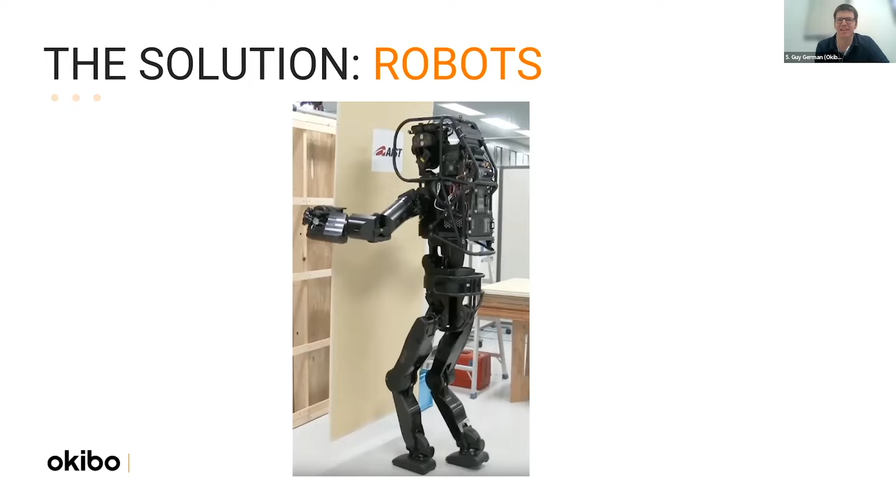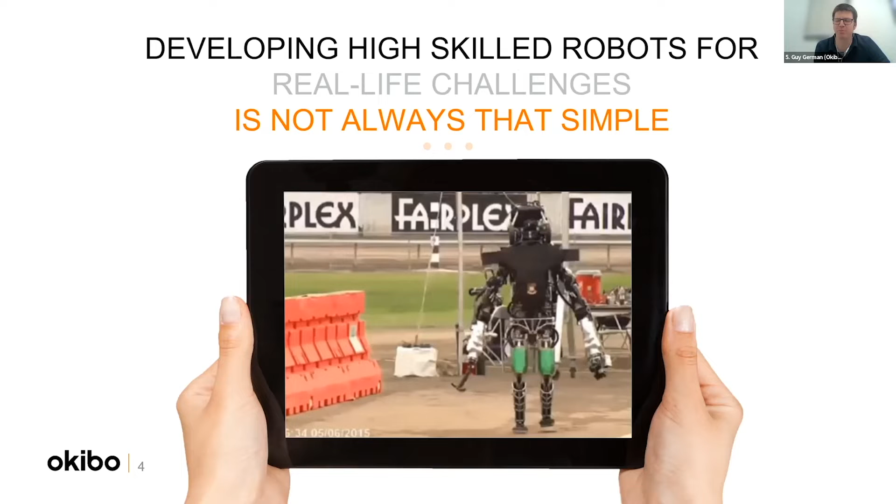So smart automation is obviously the right way to go for this huge industry, no doubt about it. And there's no better way to automate a process than using robots, which are smart automation. That's pretty much the trivial way to go. However, developing high-skilled robots for real-life challenges, not as a proof of concept or demonstrating capability, is not always simple.

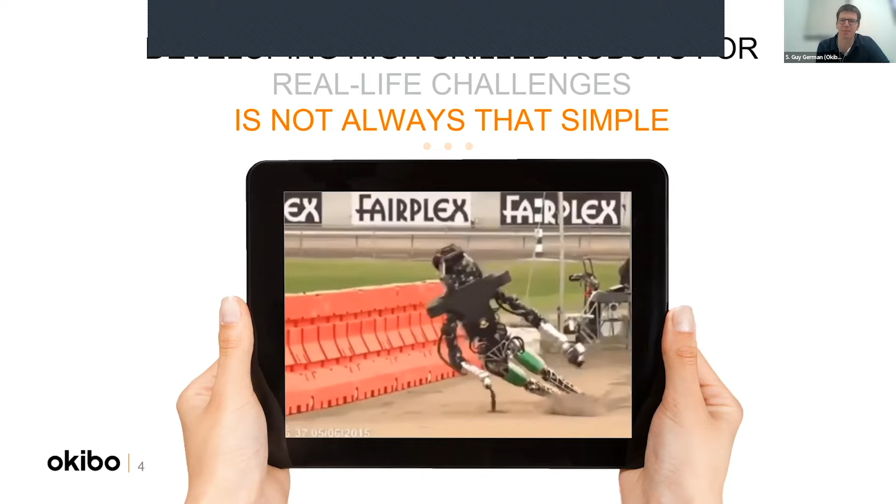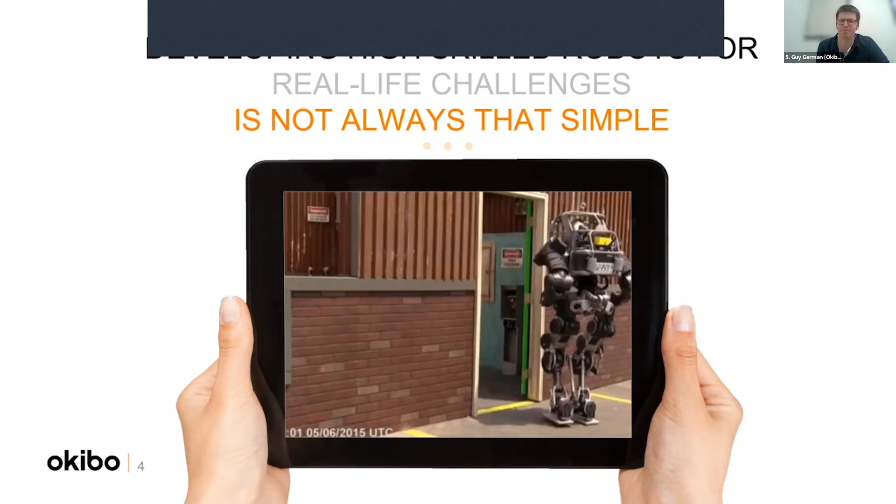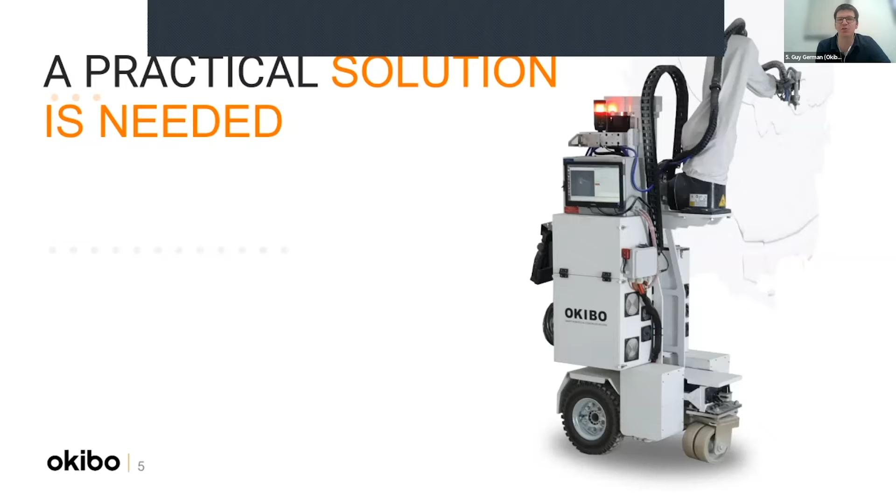It goes on and on. It's a funny video, but of course the problem is not funny. It's serious, and the industry needs practical solutions.

So what existed before construction robots were actually starting to be market available? There were basically three kinds of commercially available mature products. The first kind was AMRs or AGVs, robots working in production lines or in warehouses in very sterile environments. Usually these areas are marked with all sorts of fiducial markers and so forth, and the robots are carrying some sort of payload within this sterile environment, going from A to B—that's a solved problem.

The other kind of robots that were out there, that we have experience with for decades, are field robots for military use. Lately there are lots of solutions for agriculture technologies, fruit picking, and so on. Those robots are for outdoor use, doing some even smart operations with manipulators, but for a very definite sector—and I will later explain the difference between them and the realities in the construction industry.

The third kind are very accurate industrial robots, which usually require programming and do the same task over and over again, even if they have some sort of sensors, like in the production line to feel when the bottle is coming, or some sort of vision to support the work. It's pre-programmed and still a very, very structured and sterile environment. So these are the three kinds of commercially available solutions.

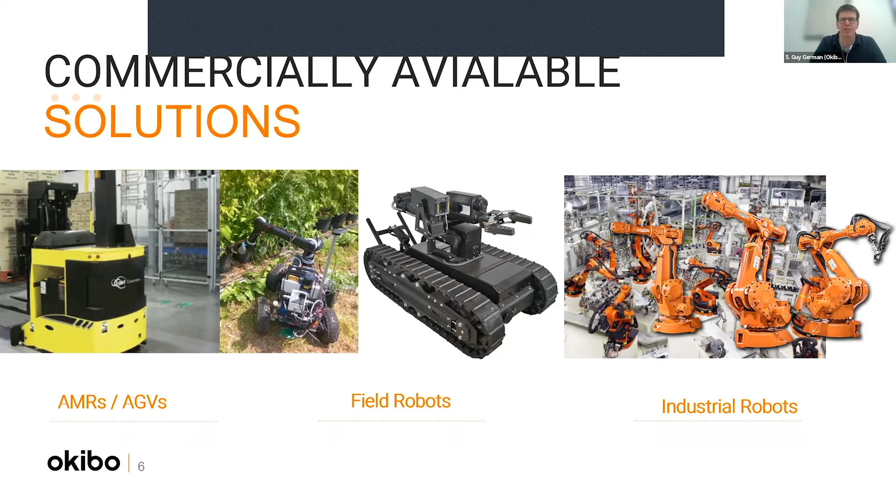But construction robots have different kinds of requirements, which often contradict each other and make the design of the robot more difficult. The robot, of course, in construction needs to be mobile—it cannot be static like the industrial robots. It also needs to reach the area where it's working. If we're talking about an indoor environment, you need to reach from floor to ceiling, but you also need to go through a doorway, so you need to be mobile.

So you need some sort of way to have telescopic capabilities to allow the reach.

It's not a production line, it's not a warehouse, so maneuverability is also a big problem. Working in a construction site, which is dirty - you have some countries more than others, but in some places you can have glass and nails and debris on the ground, which you need to pass even to reach your working area. And you have to be stable in order to do accurate work of fabrication.

So stabilization is contradicting maneuverability, because maneuverability, for example, requires the design of having rubber wheels like the field robots, which are out in the field. But when you have that, the whole system is not stable.

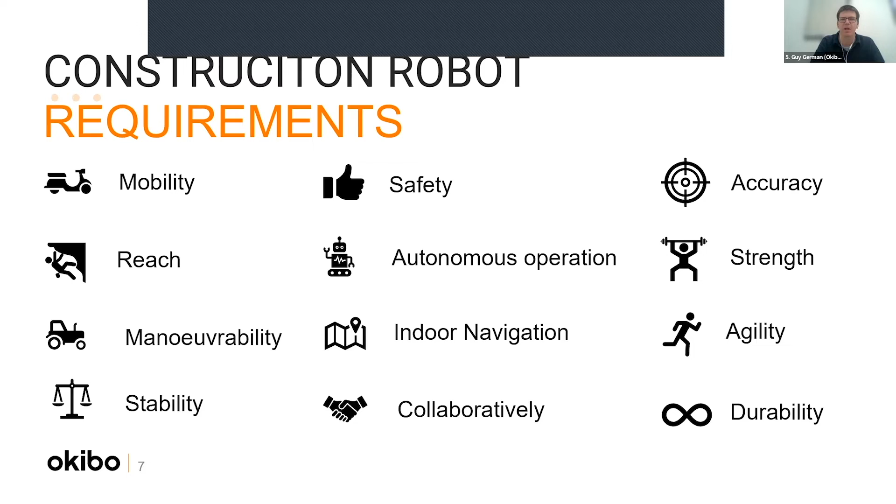So all this makes designing practical solution robots for construction sites pretty challenging. But most importantly, there are two things that without them, it's just going to be a project for YouTube - it's not going to be actually a product ever. And the first thing is reliability, because a construction site cannot offer exactly the same thing as industrial settings - robots cannot afford not working, cannot afford downtime a lot, because projects need to keep their schedules.

So that's the first thing. But even more important than all the other things, in order to have a practical solution, it has to be easy to operate. And that's just like three words - easy to operate - but behind that is basically all the technology that is required from a construction robot, because the tasks in every building are different.

In the same building, the same project, every room is different, and the same room is different from one day to another. And you cannot have an engineer programming a robot to do the work, because you don't have enough engineers, and of course you don't want to replace construction workers with engineers operating robots.

You want to have robots to be able to do the jobs smart by themselves. And you need to have an easy way to operate the robot, so not having a person in the loop that is required to be part of the job. That's the big trick behind the construction robots.

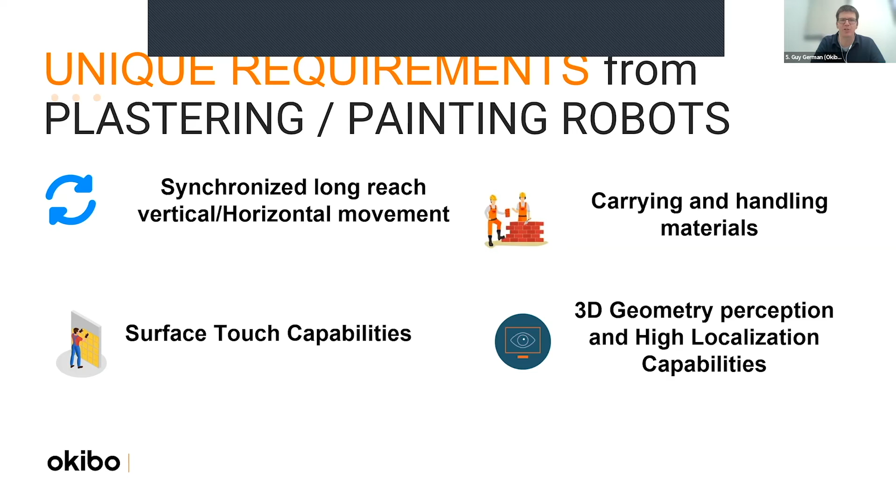Maybe just a few words - I won't take a lot of your time about our robot. So all of the above are just relating to the mechanical, to the kinematic challenges of the robot - most of them were directing to this area. That's the left part, to have a robust robotic platform. But other than that, there's the actual work that needs to be done.

So we've developed our own 3D perception algorithm for the system, and the autonomous work planner and path planner. So after you actually understand the world and you have a robot that has the capability to do the work, you need the robot to program itself to do the work. That's the autonomous capability - that's the secret sauce, that's the big trick, in order to eventually have a widely deployed and scalable solution in the market.

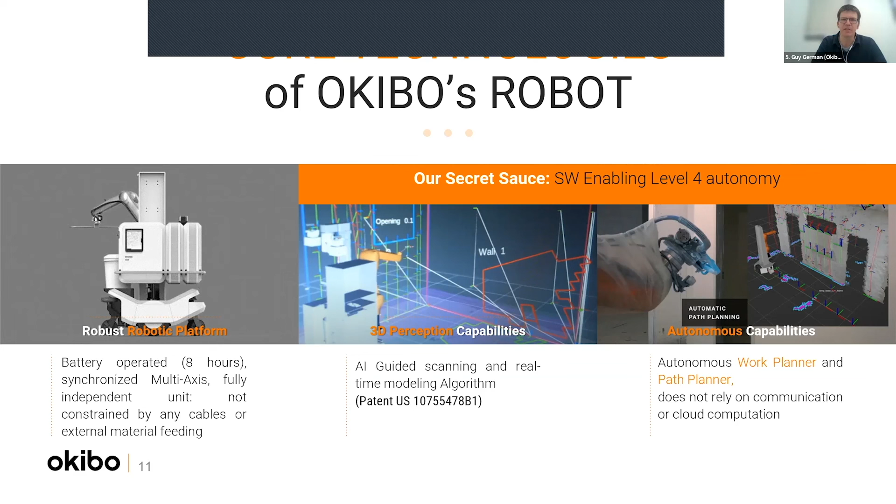So I'll end up with showing you a short video of our robot spray painting. Again, it's not the only application dedicated for this platform, but that application is now available right now in the market.